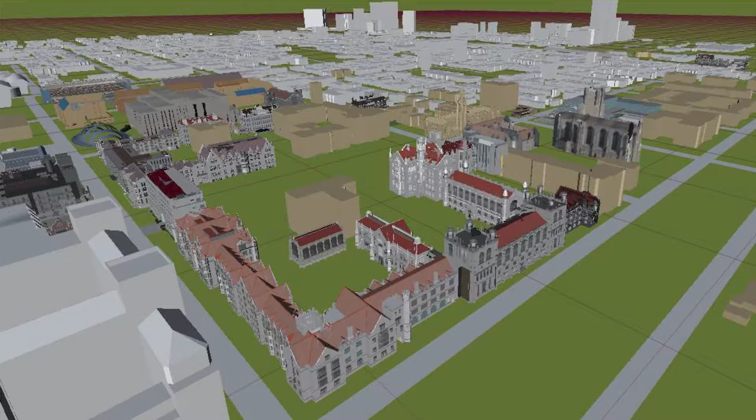So what we did then is we pushed it into an immersive visualization environment. This is the Cave 2, at the University of Illinois, Chicago, Electronic Visualization Lab. Basically this is a room, you fit 20 or 30 people in it, and it's got a high definition floor-to-ceiling graphic display. It's stereoscopic, you put on your goggles, and we drop you into the model.

Basically you can sit and they push you right inside the model wherever you are, and you navigate through this environment. You can either do it through a joystick, come in at 10,000 feet, roll through a building, go through another section, or you can put on goggles with little bubbles and stuff and navigate the space by walking through the area, okay?

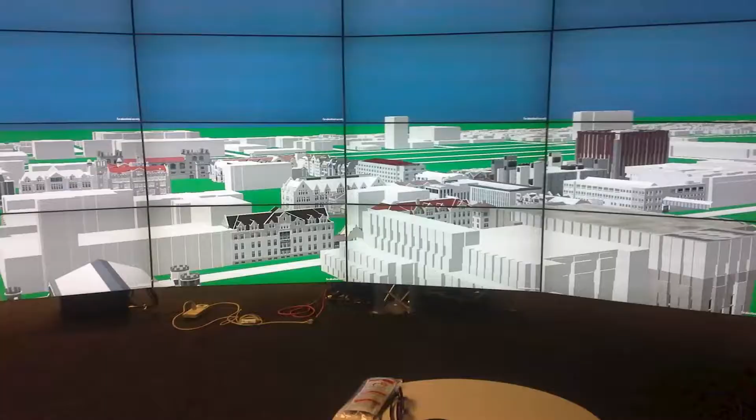So when you're sitting in this environment, if you were placed in this room, you would feel like you're sitting in this room, although it's virtual, okay? Very, very high resolution, very realistic environment. So we pushed it into this environment, that's the model, to show all the warts.

So basically, what works, what doesn't. We're putting in a very, very high acuity, very high res environment and having you walk through it. If things are out of kilter, if walls look weird, light sources look weird, things just don't translate well, this is going to show up. You're going to visualize it, see it, experience it in real time. This is real, I built this in 2015, and I've been dealing with it since then, doing improvements on it. So it's not a theoretical exercise.

So let's circle back. You've seen the end result of it, and we'll go through some of it in more detail through the talk, and some of the other things we're doing now to add on to it.

In terms of what we're talking about, it's actually three major domains. There's the model part, which is what we just saw - the modeling piece, how that all comes together, the 3D environment you're building, the objects you're placing into the model. That's my core level of expertise. Then there's the visualization part.

You want to use that model in different visualization environments depending on whatever mode you need. You might need it out in the field, you might need it in a collaborative environment like that immersed cave example, you need it on your desktop for a particular task, for asset management or whatever. So you're going to want it in different visualization environments for different tasks, but you want to use the same model for it.

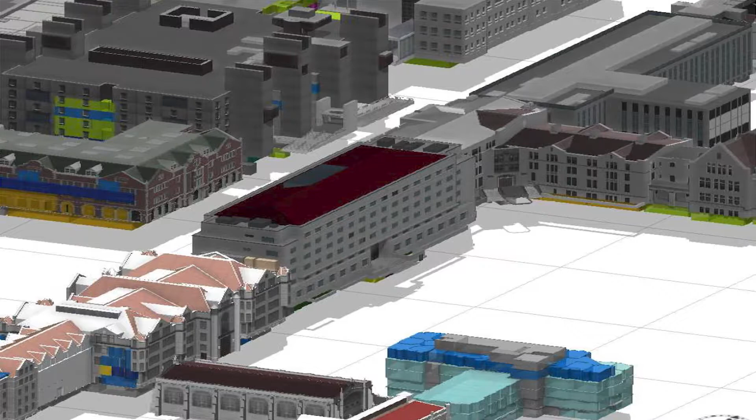We also had a three-part BIM program. One, we actually went in and scanned — this is a scan we did for the Gothic area, the main quadrangle, which had original linen drawings from the 1890s. They're basically hard to even read, they're precious, but a lot's happened in these buildings since then and we didn't have good records.

We went out and made a decision to scan it because they're in the process of a major capital project to repurpose these buildings. Not much had happened to them in the intervening period, so they're substandard. We scanned 3 million square feet of that. We also created BIM standards for the new BIM construction pieces coming in, for existing projects, so they come in at a certain format and design that we can use both in operations and to push into the virtual twin.

I'll walk through that. We also grabbed BIM drawings that were done pre-standards, extracting things from deliverables and construction drawings. That's hard sledding if you've ever done it, hard to get them stripped down and working semi-coherently in an architectural frame. So we did some of that. Those are the 3 tracks, and we did all 3 of them.

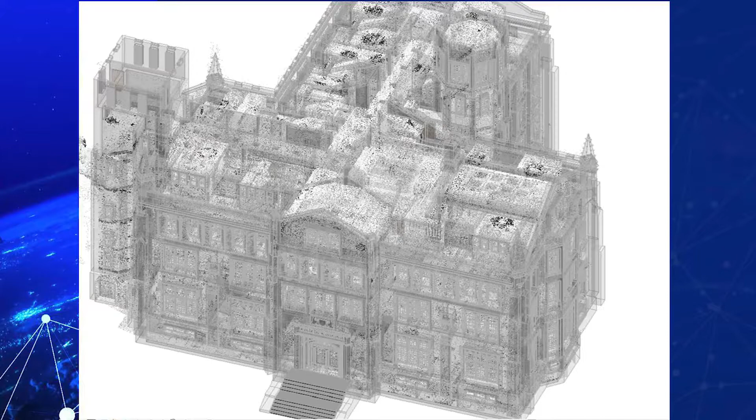For this, we came in and set up a standard architectural model that the clouds actually created, so it's pretty much standard across that. New deliverables coming in from project work will also follow the same architectural model format.

We also put it into a federated model, using our survey control network as part of the data acquisition piece. This was actually phase 2 - we've done 3 million square feet. So all these models actually work in the same coordinate space.

We can take it and just drop it into the GIS if we have to. It all sits in there and works together - we can slice and dice it however we want for project work or whatever. Same thing, the point clouds run along with it, both indoor and outdoor, so we basically have an entire data set of both.

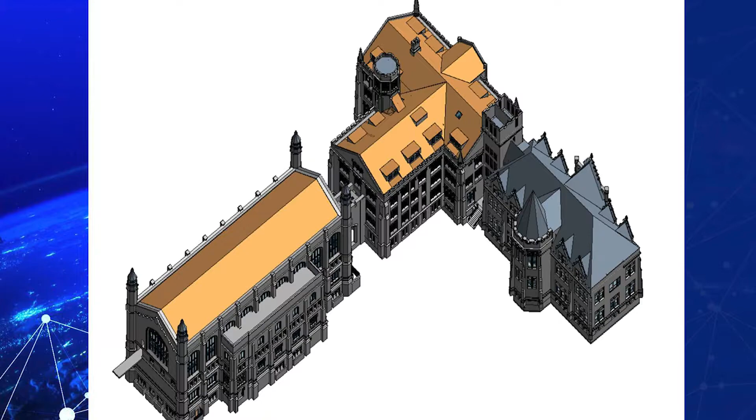When we do a project, we come in - here you can see the roof lines and stuff. They're basically composites that work together in the same coordinate space, 3 million square feet. We can slice it and give contractors new project work with the cloud and the BIM model, which saves us 15 to 20 grand per project to spool up a structural project or whatever, because they've got a lot of tools to work with right from the start.

The idea is when you're done, you take that MEP model you just built, or a structural model you did for the roof, and push that back into the main model for those particular elements. We have standards for that, so over time, as project work continues, we eventually get a fully fleshed out BIM model in some cases.

This is the rest of it. This is the main quad, the first phase of the project. That building over here is the administration building.

This guy right here actually fits right there. We didn't do that building at the initial acquisition - we just concentrated on the newer building. That one was built in the 1950s.

This is again the first phase of it, so it all works together. We can slice this out however we want and push it into projects, utilizing it on site.

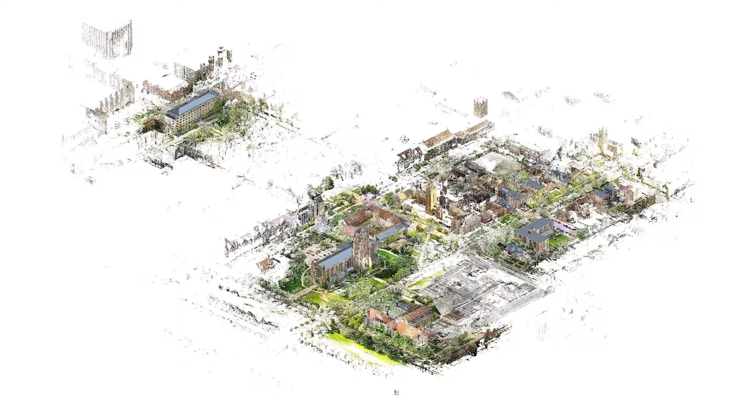For things that were pre our standards, we came in - this one was a hospital pavilion built in the medical center. They're not affiliated with the rest of the university's facility services; they have their own facility services. And so they went off and built this huge hospital pavilion.

We took that existing BIM model and just loaded it directly into the virtual campus model. There are GIS objects in here, and some additional BIM stuff back in here. So we dropped that model, which came from another source, in here even though it didn't have any standards on it.

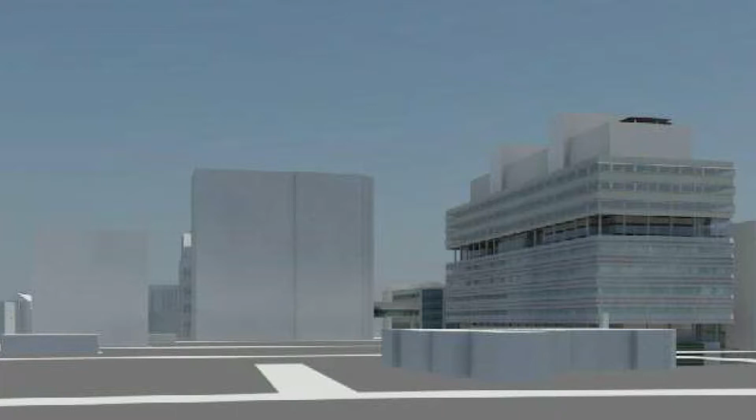Okay, so for the model development, migration to the virtual twin, we'll walk through the main components of that and how we did it.

We pushed it into Unity. It's a gaming engine, it's open source. It's good and bad, I'll talk about that in a little bit. Basically it's FBX exports out of their various subsystems placed as an FBX import into this environment. That was the main data exchange. We'll talk a little bit about that. It doesn't necessarily work very well, and we're trying to address that - it's the work I'm working on now.

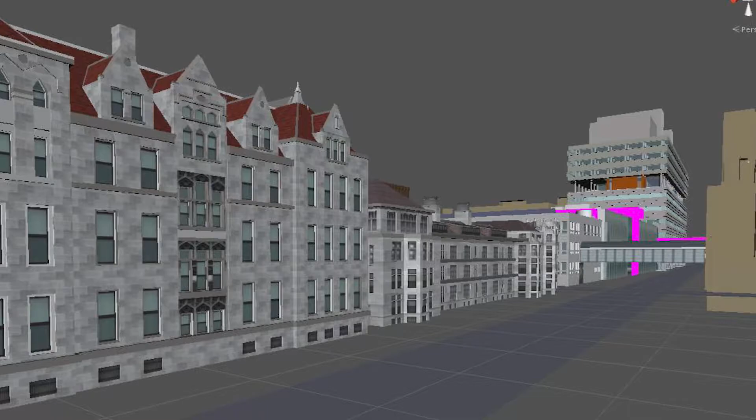And then we went totally crazy - we tried to really bust the system. So Mortenson was in the process of building the new North Dorm on campus, a huge dormitory, 12 stories. They brought a construction drawing in and even had furniture included in its library and so on - a huge number of objects, window details along with clips and framing and stuff like that. We were able to bring it in, but it's pretty crazy. It's like, can we bring a construction level model into the environment? We got this one in, but we probably couldn't do number 2 - it just wasn't going to go. But again, see the limitations of the technology.

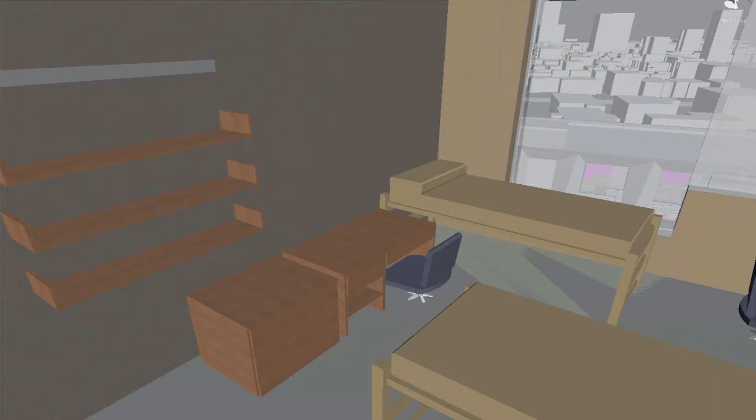It was part of the prototyping. But as you can see, we got the furniture detail here, and then through the windows, the rest of the city model sitting out there. So it all works together.

Problem with it is that the point clouds are enormous, right? They're huge. They have a hard time working with them. Unity, in fact, will only load in about 1 million points. That's nothing. That's zip. I can barely load a couple files.

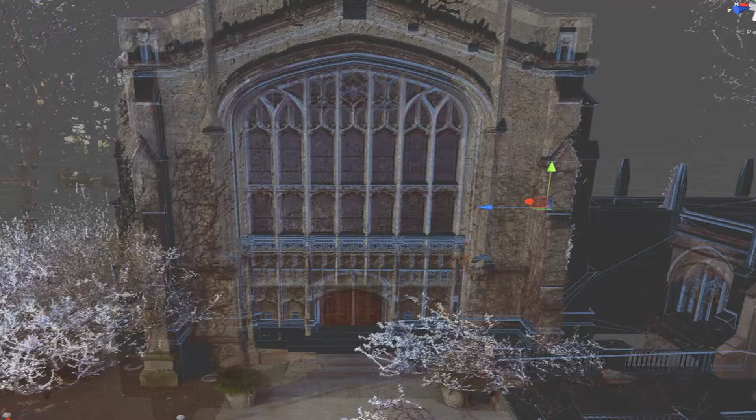So we're prototyping this right now. If this actually comes to fore, then we've got a surface model. Because we've got a point cloud on it, we don't have to map it separately, we just take the point cloud and map it to the surfaces.

Okay, so a little bit on CityGML on the open standards front. Now, how many people here know anything about CityGML? Okay, so we have a few. I could do a whole talk on CityGML, but I'm just going to hit the main points and why it's important, and why you should think about it when you start thinking about doing virtual twins.

So one big concept that's really nice about CityGML is it's built from the ground up to do these kinds of modeling experiments at a citywide scale. Built into the model is the level of detail, so LOD 0 at the 10,000 foot level is just a polygon sitting on the ground, extruded to a little more detail with roof pitches, then additional details and some windows, all the way down to the room level, LOD 4.

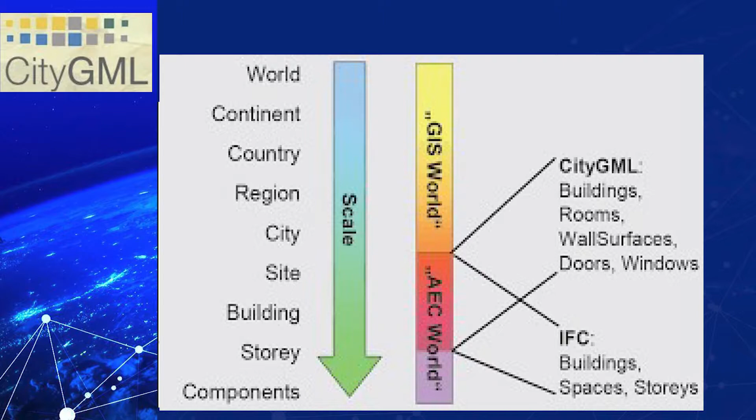Basically you're dealing with a native BIM model. In many cases it's not necessarily Revit, it could be other software. You don't necessarily care—it could be a construction level model, a LOD 300 level model, whatever you have available, in any format. The idea is to take IFC and leverage that, since that's an international standard.

Take IFC objects out of this BIM model and make a one-to-one translation into City GML, and then that can get migrated into a virtual Singapore model, which I'm going to explain a little bit later.

So they're basically taking that right now—based on the things we have in City GML, this is the volume of that building. It's an LOD level 2 building based on point clouds and LiDAR acquisitions we did aerially. We got that, but this is the extra detail we can add to get it to LOD 2.5 to LOD 4, which would be room level. You can't go in and scan somebody's apartment, so how are we going to get that level of detail into the building? By leveraging your project work and things that are going into that to help inform the model.

And the last little bit on City GML is this space we were talking about before. There's a whole Open Geospatial Consortium that deals with City GML, Indoor GML—internal navigation pieces that are the next kind of thing you want to do. So now I've got all my rooms and building details—how do I do navigation internally for wayfinding and stuff?

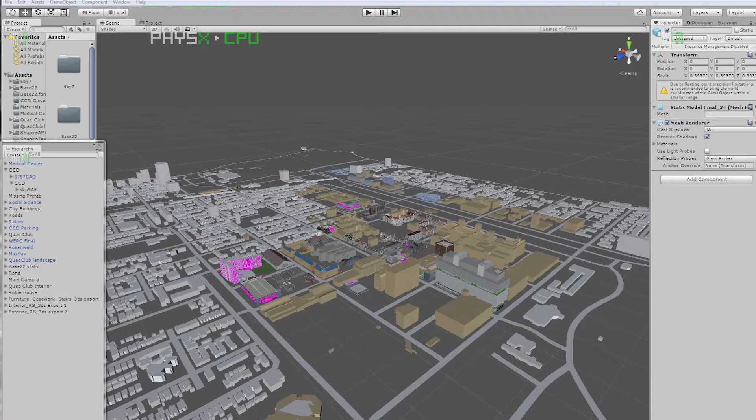On the AR side, it always seems overhyped with very little real progress. There's some work going on, mostly with Layer out of the Netherlands. They seem to have the best products and are working with City GML objects, using the model in AR format, like overlaying sewer data in a mobile environment. I don't have many good examples. Layer is about as close as I've got, but they mostly do buildings, and they're pretty good at buildings, but for utilities I haven't found anything.

And then there's our stuff in the Cave. We've loaded this in and tested it thoroughly, and we can see the warts that came out of it. One is obviously the mapping of the graphics. It just doesn't work very well.

The nice thing about it is that we're able to bring in other data sources, like the City of Chicago Police Department. We're studying some stuff on campus, loading in Google Maps and their data sources onto this mapping system so they can do collaborative analysis for crime prevention on campus.

As you're sitting and walking through it, of course this doesn't do it justice since we're not actually in the room with goggles, but this gives a snapshot of how it works. You can walk through on the sidewalk, into the door, into the building, up the stairs, and into the room. It's very interesting watching people experience this for the first time, because as they walk through it, they're dodging chandeliers that seem to come right at them.

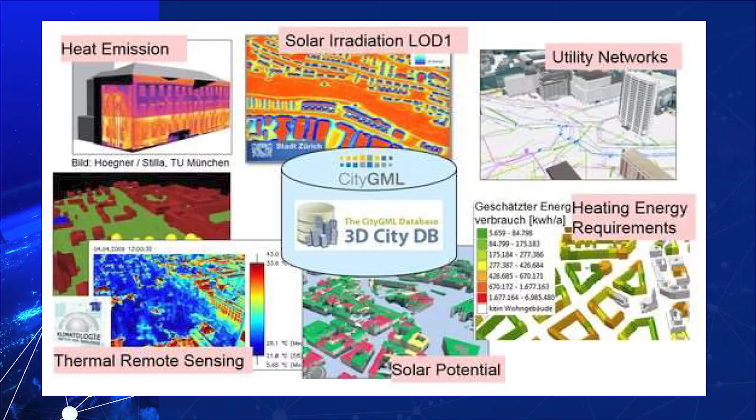Also, noise is another one. They do a lot of noise analysis because there's a lot of traffic and density, a lot of activity.

This is kind of, again, making the division out here. The BIM IFC stuff's going to keep going, it's not going to change, all right? So all this stuff is still going to go on. Your energy analysis stuff, but this is going to be building centric, it's going to be in your systems of record. So they both have a role.

You're going to be using this for your energy modeling and capabilities at the building level, but for a macro level analysis, you can't load all these BIM models to do it. It's too complex, and it's also overkill, you don't really need it. You just need surfaces, you need materials, you need exposures, you need orientations.

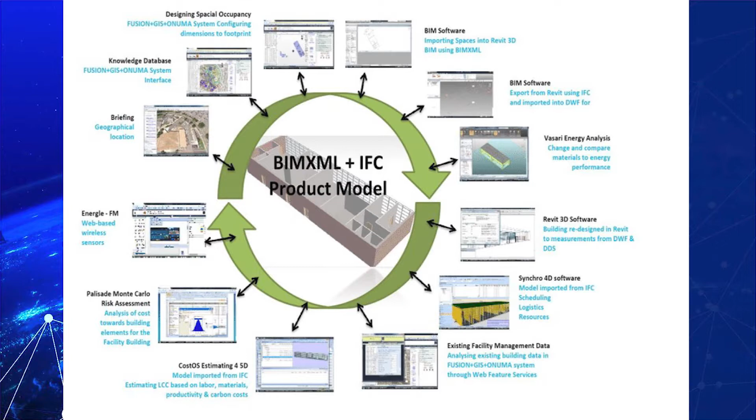So that's kind of the stuff that I've been doing, and then let's look at what other folks have been doing. I picked out three projects that I thought were really good virtual twin projects worldwide.

The first one is the Virtual Singapore project, which went live in 2018. They have a CityGML model of level 2.5 for the entire city.

They spent $80 million on it. That also includes all the data acquisition part, as well as building the model, as well as working with Dassault Systèmes to build their visualization tool set, their UI, their CAD 3D visualization tool sets. So they're like the world leader on that.

So they basically have now built a tool set that both visualizes this and manages it, so they've got desktop tools to do it. And then Digital Built Britain and also the Ordnance Survey - we'll walk through a little bit of stuff that they're doing, very interesting. And then finally, University College London and Space Syntax, which is really close to my heart in terms of architecture and planning. So these are three really good examples of what people are doing today with the data.

So the first example I've got here is the Singapore Land Authority. This is what Dassault Systèmes built for them, which is basically a visualization tool, library, UI. So they've got all their tool sets over here, they've got different snapshot types and things.

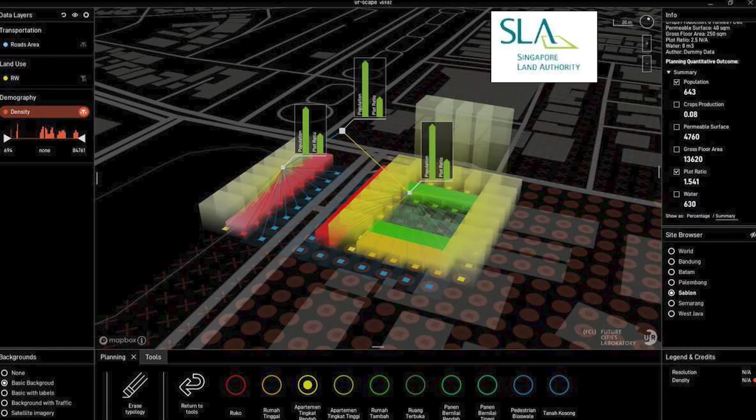So they're using that as part of it. And then this final bit here is stuff that's going on with the SLA and the visualization tools.

Okay, so this is what ETH Zurich is doing on the cooling for the heat island analysis, again using the same data sets, but a different analysis time series.

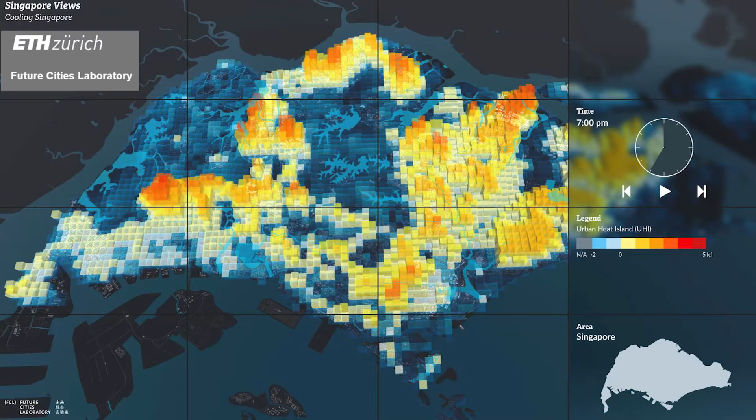University of Cambridge and Centre for Digital Built Britain are basically dealing with BIM technology and how it goes through the whole VDC part on the BIM. They have a national standard that they're pushing across the entire country. And then the Ordnance Survey is picking up on this, saying, okay, after we take care of the BIM problem and get the tool set on that, how do we take that and migrate it into City GML?

And then the final bit is the space syntax, out of University College London. It all stems from the Kevin Lynch stuff. So basically, orientation is a typical Kevin Lynch urban analysis diagram, rolling into Colin Rowe and Collage City - back to grad school again. It's about how urban environments work over time, with a series of layers of buildings and so forth, and being able to do that now in a digital, 3D environment.